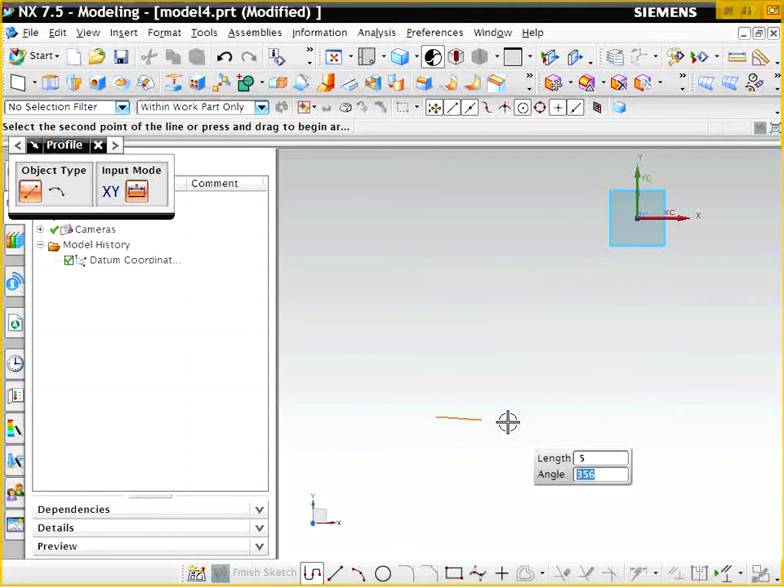So we have a length of 5 here. Oops, go ahead and try that one more time.

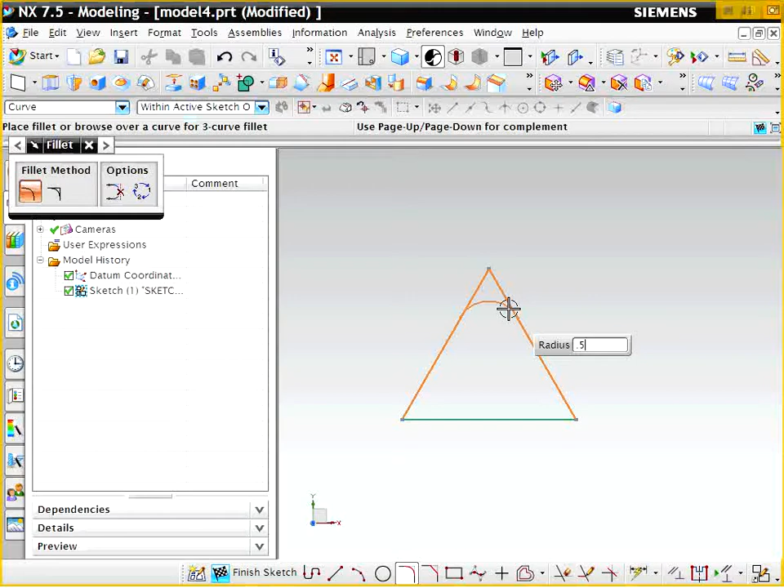Okay, now I'm going to smooth the edges with a fillet function, just as we did before. I believe the radius is 0.5 on each one of these. So here we have our smooth triangle again that we extruded last time.

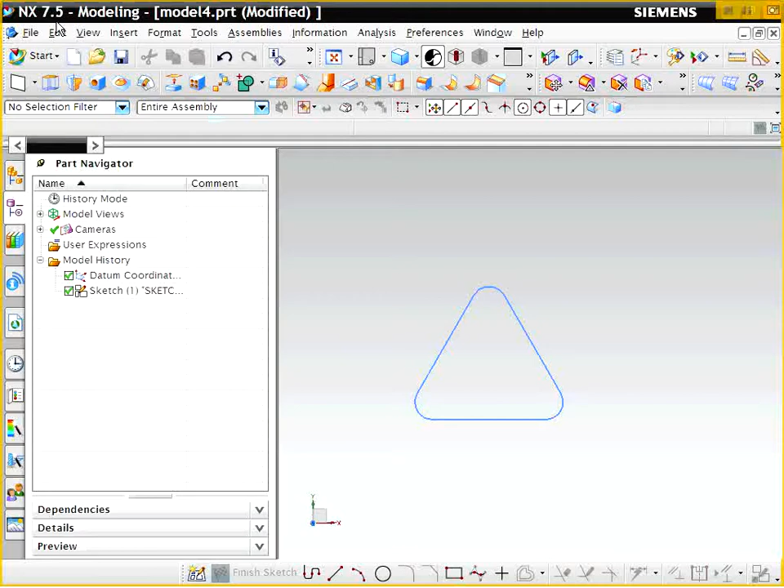Now I'm going to go ahead and finish this sketch. Now what I want to do is extrude this function, but now I want to use the offset feature, which is a little bit different than we used before. So let's click extrude and we'll select the curve that we're using.

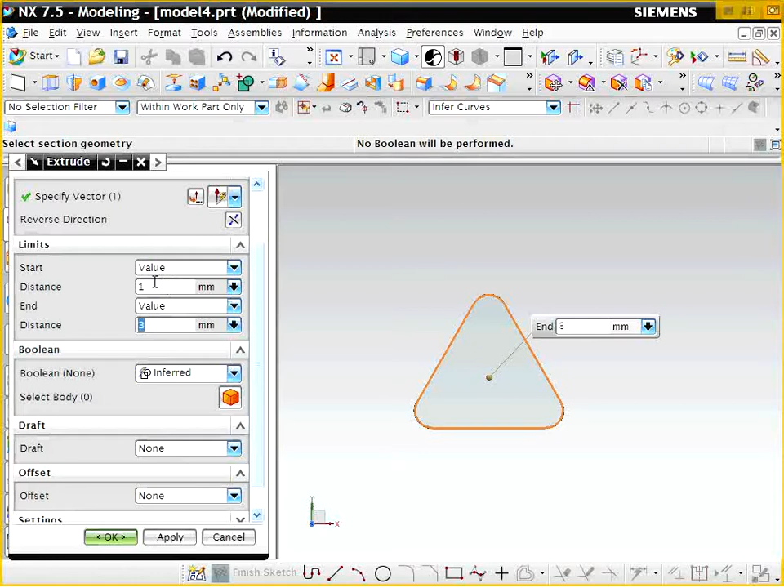Then I want to do a little something different in this case. We can leave this distance the same, where it produces this thick shape. But now what I want to do is, instead of producing a solid shape, I want to produce something that is hollow in the center.

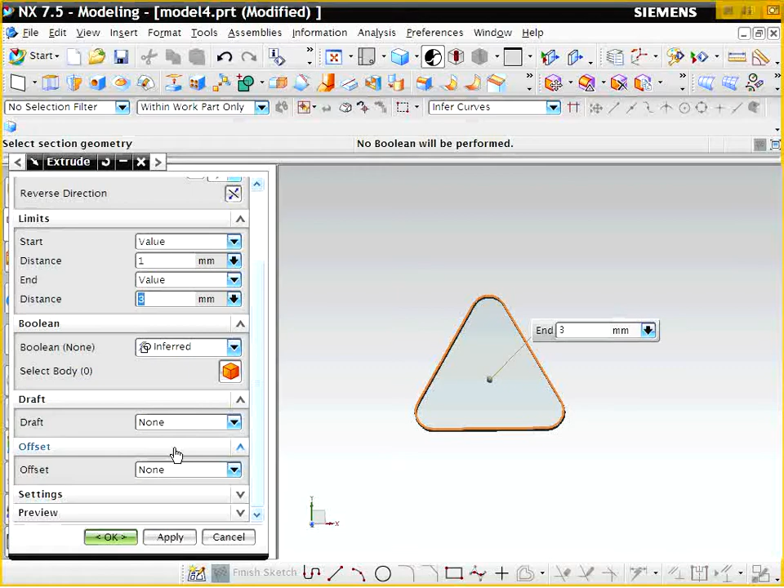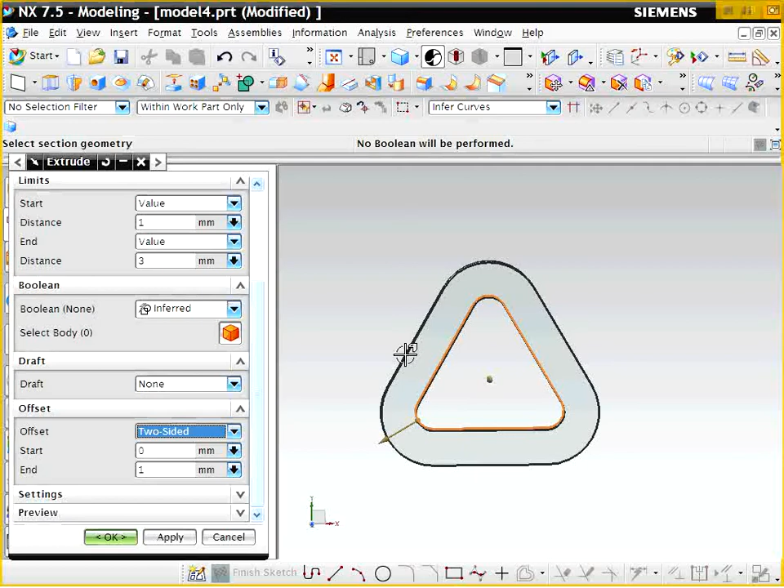So what I'm going to use is this offset option here. I'm going to go ahead and use this offset option, and select a two-sided offset option. What that does is create an offset, which means it starts drawing the extruded part of this object at the surface or boundary of our sketch, and ends drawing the surface of the sketch at the end of wherever we specify that distance to be.

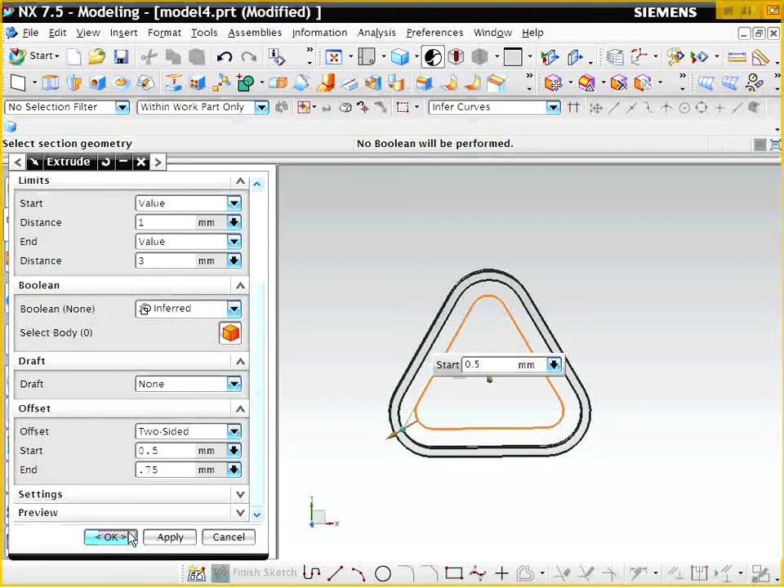In this case, let's specify our starting distance to be 0.5, and let's specify our ending distance to be 0.75. So here we have an object with a given thickness and shape to our specified dimensions. Let me go ahead and click OK. So now you see we have the same extruded solid object, except now we have this empty slice in the middle, and this is due to using the offset function.

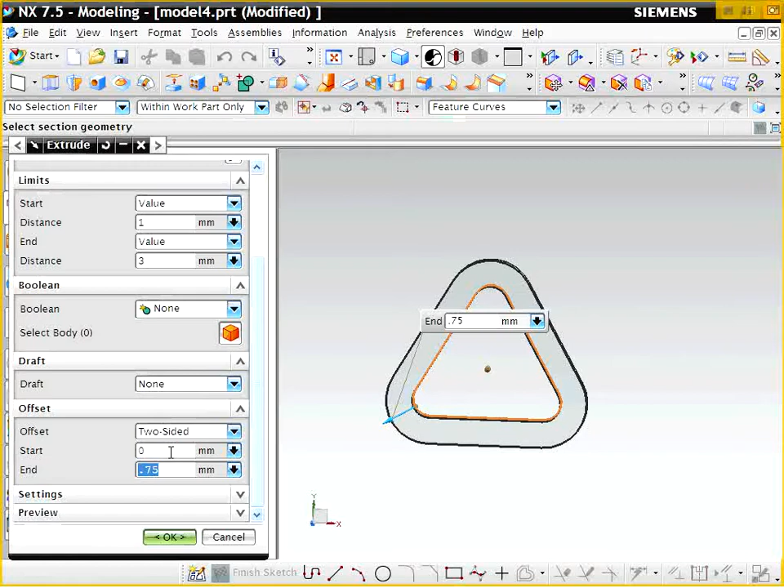And you can play with different sizes of this. You could look at this extrude function and change it to go from 0 — let's say you wanted it to go from 0, the right is the surface of the object, and let's say you wanted it at 1.25. So now, when I select 0, it starts right at the surface of where I drew my sketch, and it ends at 1.25 millimeters from the end point there.

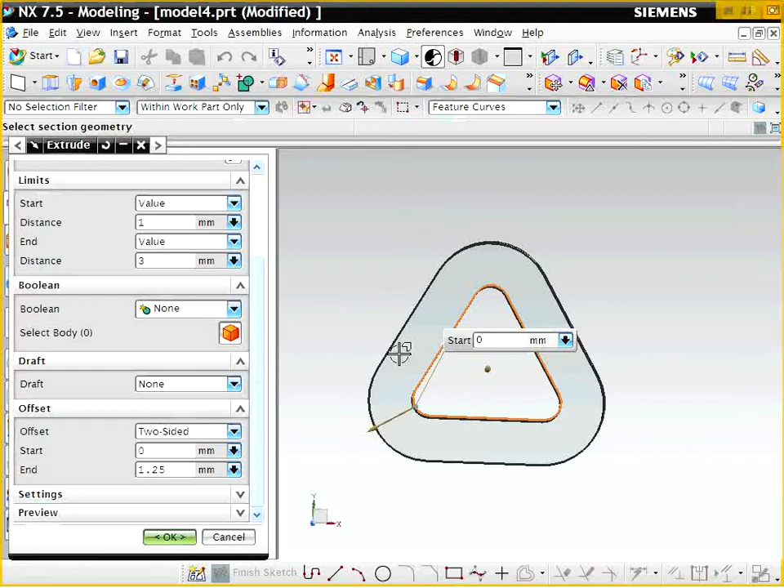Let's say now I wanted to do this extrude function again. Let me delete that. Let's say we have our shape once again. And in this case, what I want to do is draw angles that go at a certain degree from the surface of this particular object.

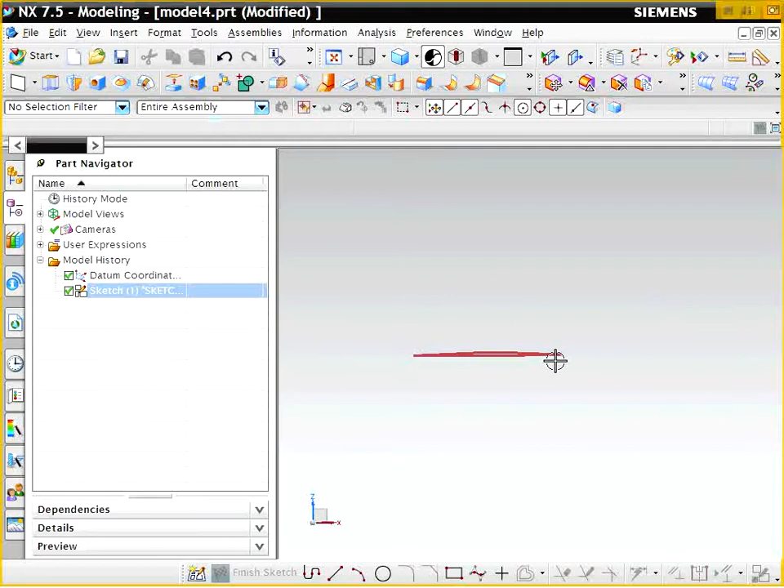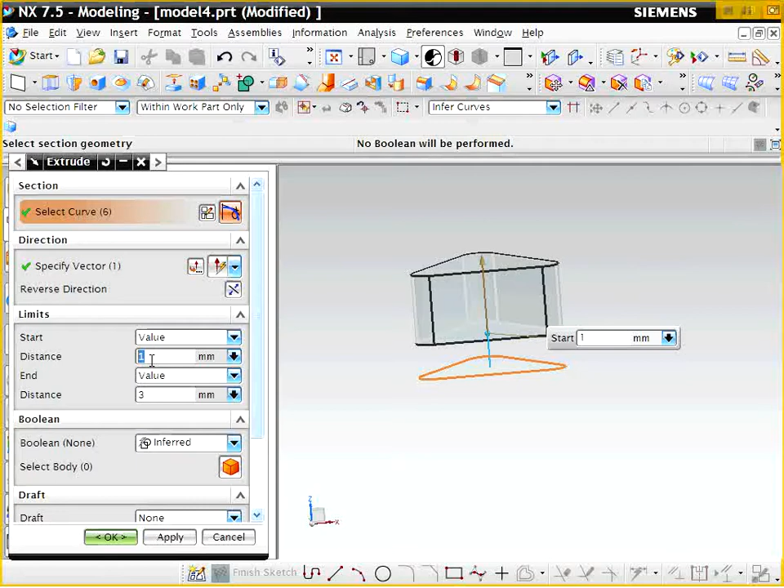What I'm going to do is select the extrude function, then select my curve. So here's our shape that we've been seeing until now. And let's extrude it in this case from 0 to 1. So you see that it will change where it starts and where the object stops. Let's say in this case we don't want any offset, so let's leave the default, which is none.

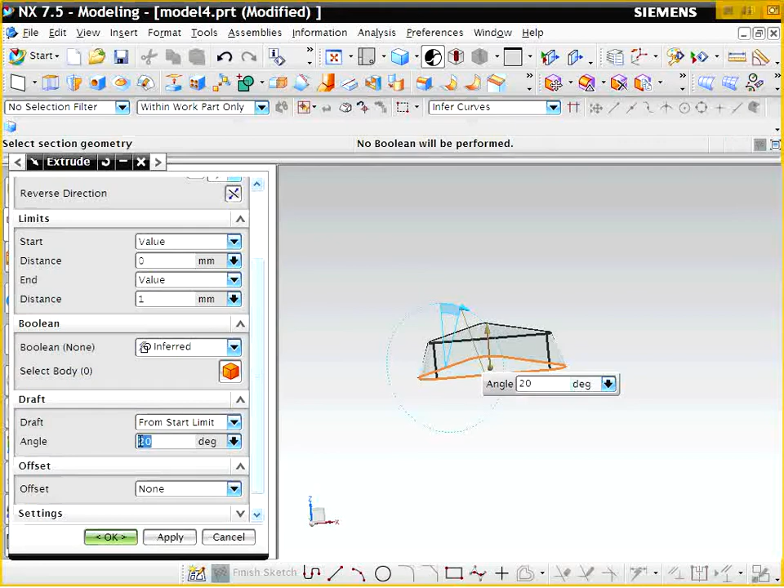And then we'll click on the draft. Let's click on this draft button just to play with this particular feature. For this draft function, I'm going to select set from start limit, and input a 20 degree angle. You see what has happened is from the start, which is our sketch, it's created a 20-degree angle to the top of our extrude feature. So we have a little bit of an angled three-dimensional object here now.

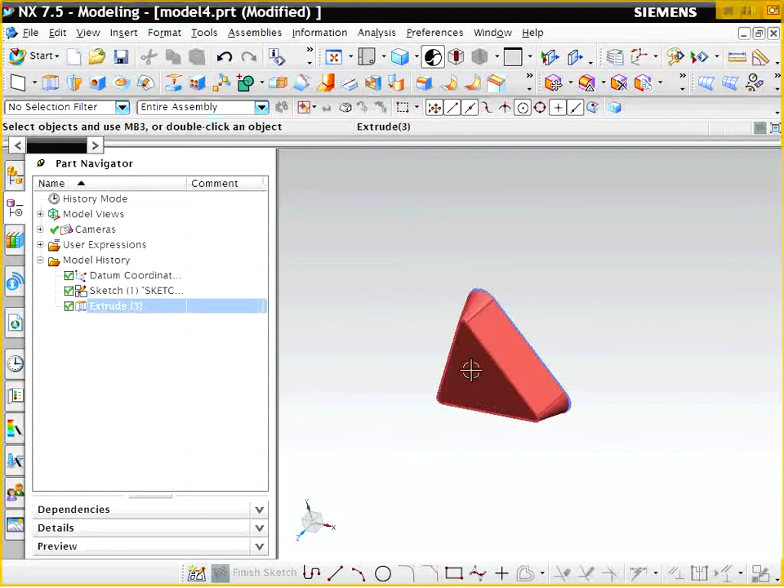There are some other features you can use with this extrude function. One of them is using primitive features, which allow us to insert things like a block.

So if we want to insert a block, let's say we wanted to make a 2 by 3 by 6 block. When we select the block, we want to make sure it says origin and edge lengths, so we can specify where we want this block to start.

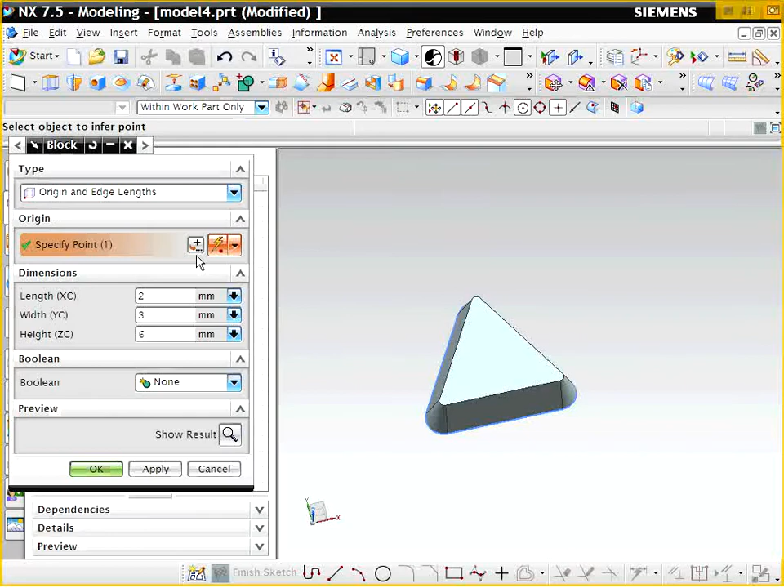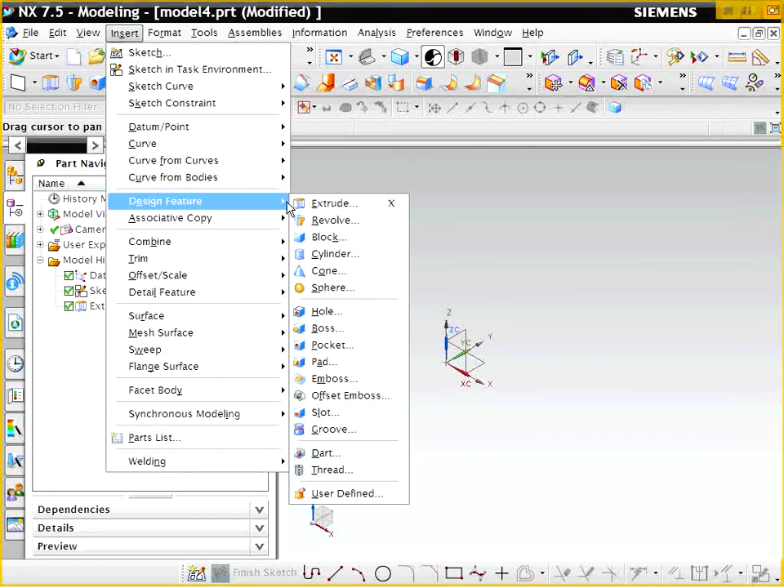Let me go back a little slower. Let me start at this origin point again and pan to the center. Let me select this view, which may be better to illustrate this. So we can go to Insert, Design Feature, and then select Block.

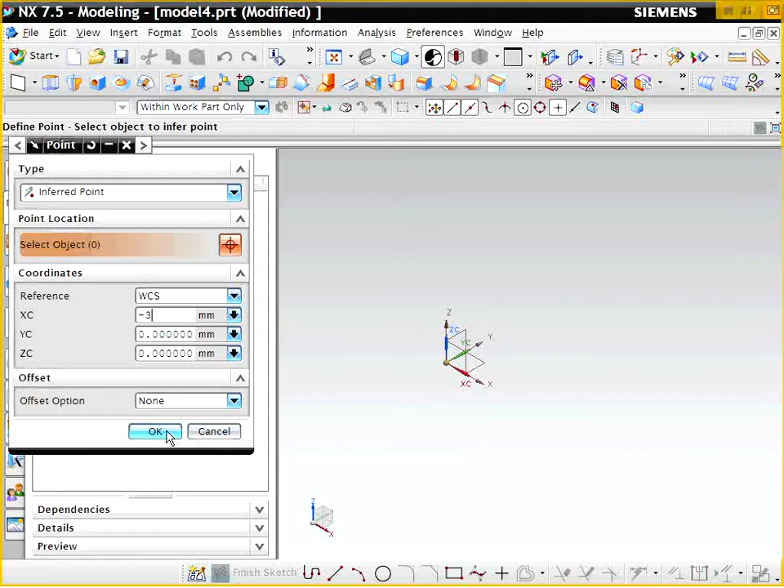To select the origin, in the Specify Point option that comes up, we can click this point dialog, and it gives us the coordinate system for where we want this to start. Let's say I want this one to start near the origin, but at an x coordinate of -3 for some reason. So now my starting point has moved to an x value of -3.

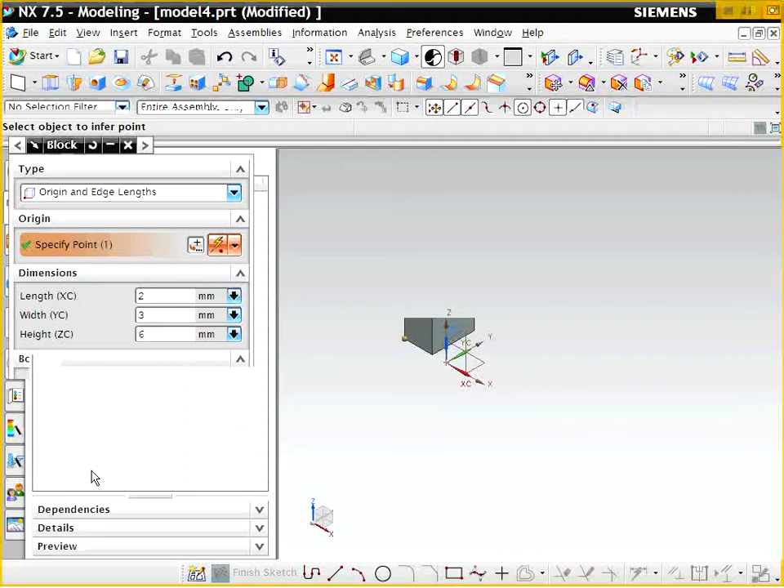Let's say I want to input the x, y, and z coordinates of this block: 2 units long, 3 units in the y direction, and 6 units in the z direction. Now I'll click OK. So you see I've created this block on the side of the axis.

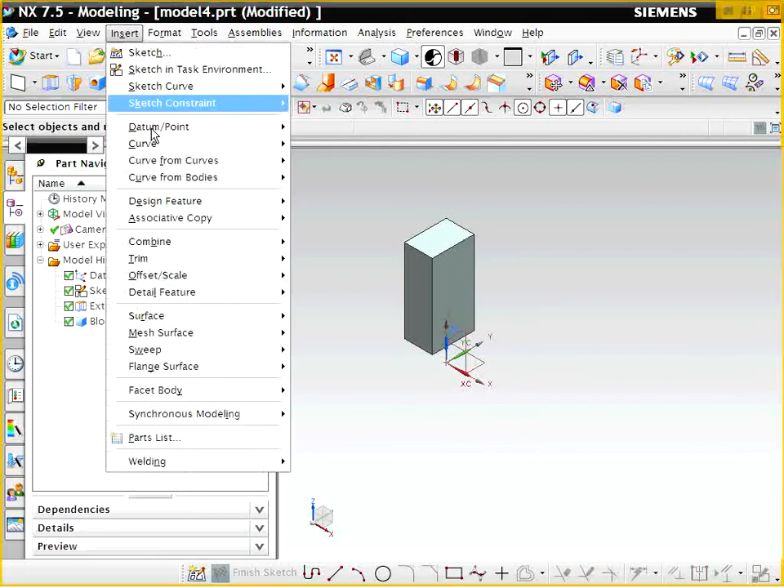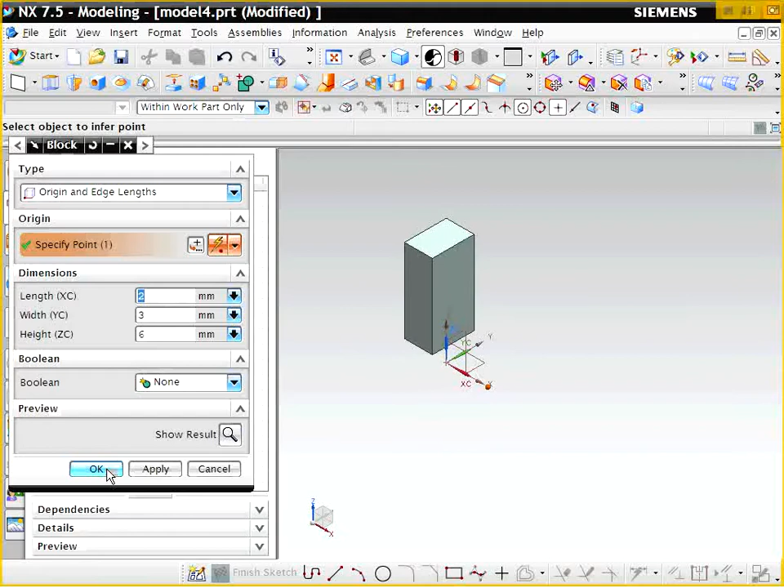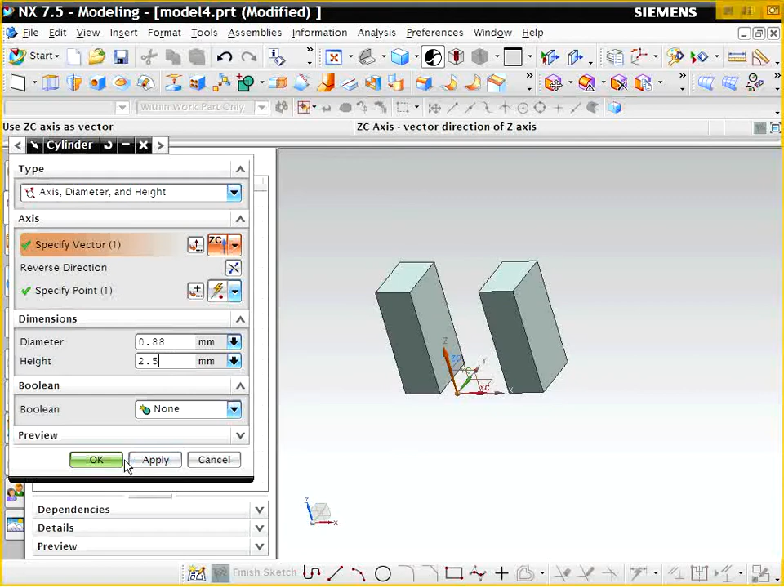You can also create a cylinder shape. So we can go to Design Feature, go to creating a cylinder, and specify where we want it. Let's say we want it to go into the positive z-axis direction, with a diameter of 0.88 millimeters and a height of 2.5. Now you see we've also created a cylinder shape.

So these are just some tools you can use to quickly create a shape if you need to. Once we get into more advanced features, we can see how to use these shapes to create some really advanced and cool looking parts that have real engineering significance.

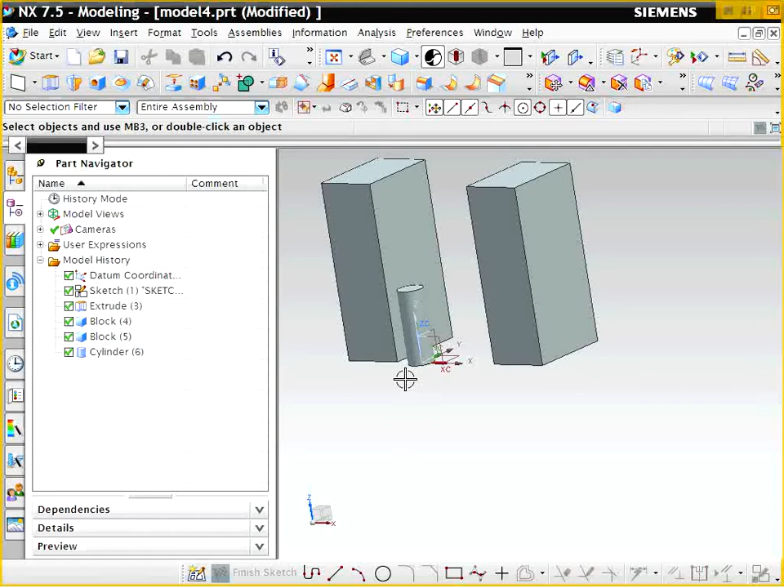I want to cover one last topic, and it's going to be the revolve feature. Then I'll ask that you do your in-class exercise, which is designing a pool cue. Let me go ahead and look at this on another plane.

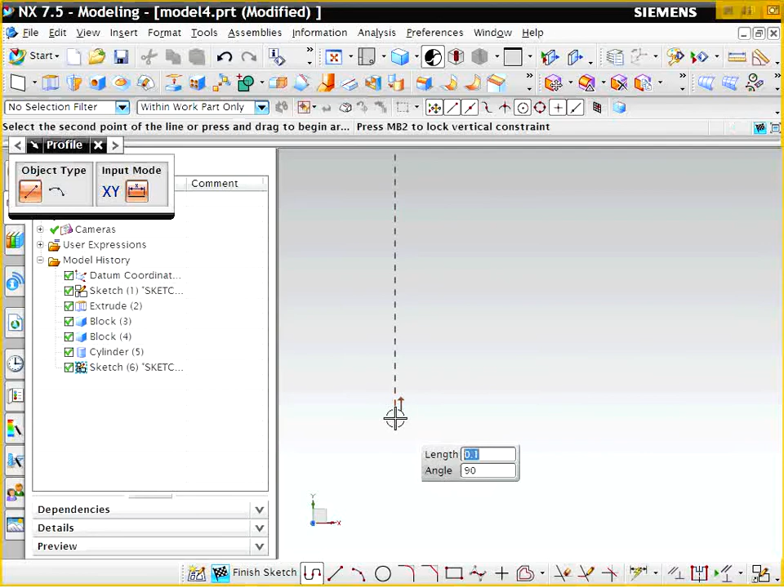Now I want to use the sketcher to create a sketch that's given in tutorial 6.3. Let's go ahead and start. I think the length is 2 in this case for this sketch. This is the height of this line, and I'm going to go through and input the different heights of each one of these different lines.

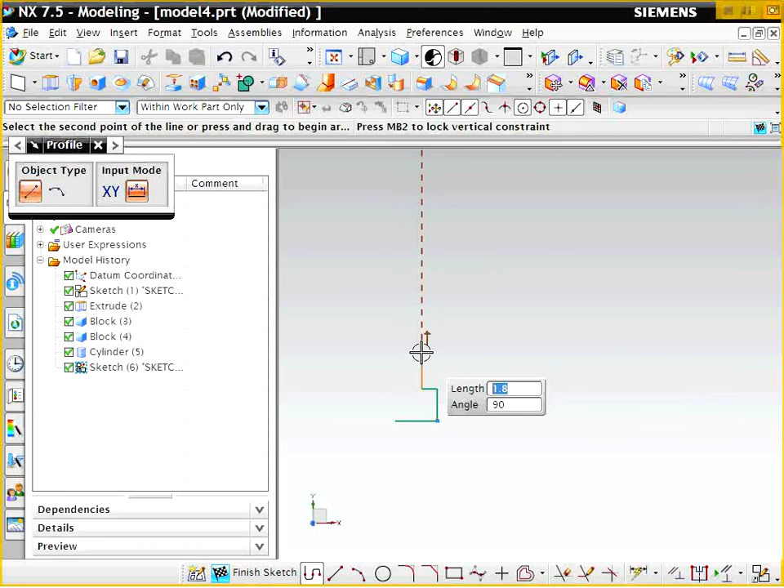Okay. This height is 1.8.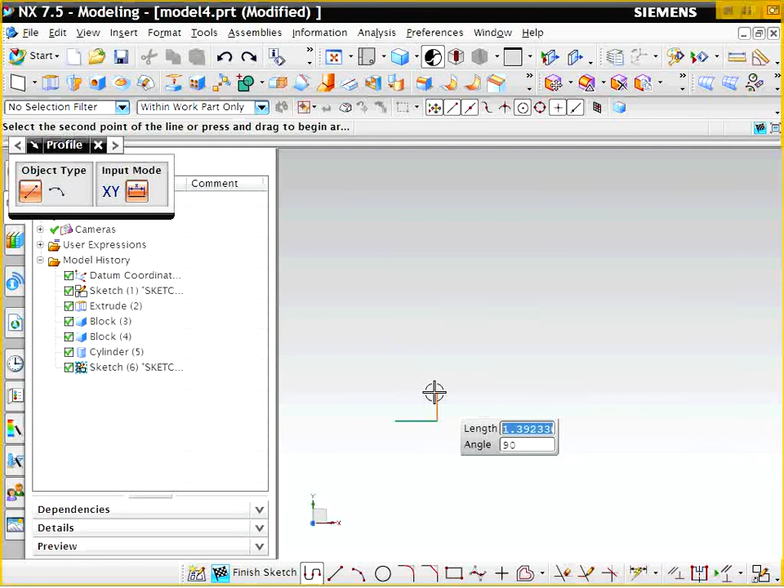Well, for time's sake, let me go ahead and stop here. What I want to leave you with is the design functions of extrude. I'll continue this in the third lecture, which will be short, and then we'll go ahead and practice our other feature. Okay, so I'll see you in just a little while.